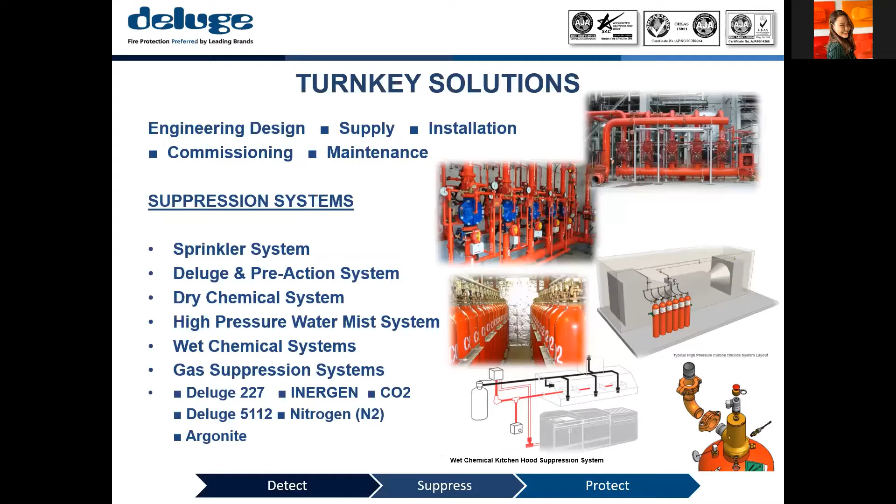We provide a full range of engineering fire protection services, including water, dry chemical, and our own gas suppression system, which we are here to learn about, as well as foam-based suppression systems and other firefighting equipment. Not to forget, fire detection systems. So yes, we have got you covered for all of your fixed fire protection needs. We use proven, reputable brands which adhere to stringent environmental standards to ensure our clients receive reliable, high-quality, environmentally friendly fire protection solutions.

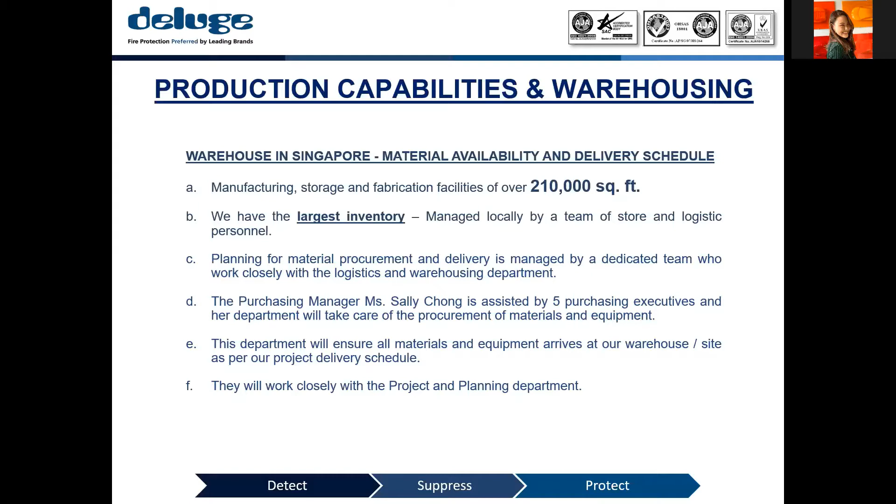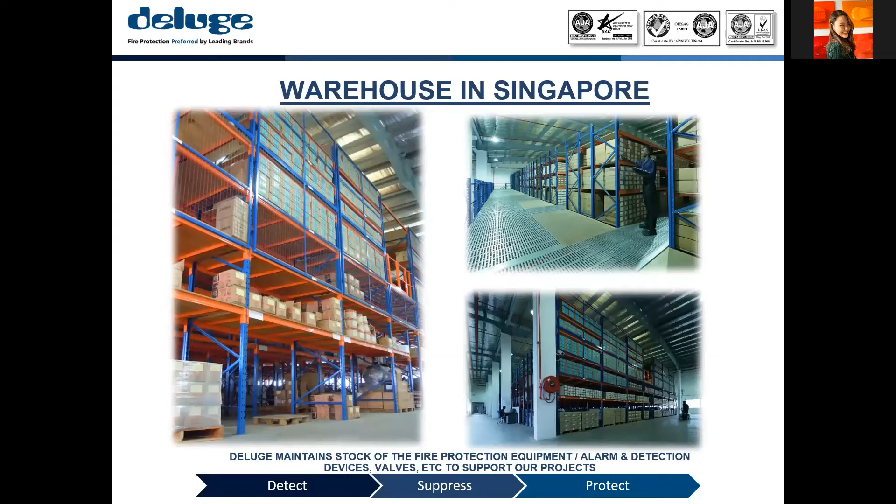Focusing on providing our customers a one-stop service shop, our warehouse of over 210,000 square feet has the largest inventory, in excess of $1 million worth of stock. Our in-house Deluge fleet of lorries, service vans, and aerial platforms can ensure timely and efficient deployment of manpower, materials, and equipment to sites. Apart from that, we enjoy the distinction of being the first fire protection company in Singapore to offer a one-stop design and build engineering solution.

With our prefabricated fire pipe solutions, we are the first fire protection company to invest and build our own factory in Johor. Our 8,000 square meter factory can produce up to 400 tons of prefabricated steel pipes per month to serve ongoing projects in Singapore and across the region.

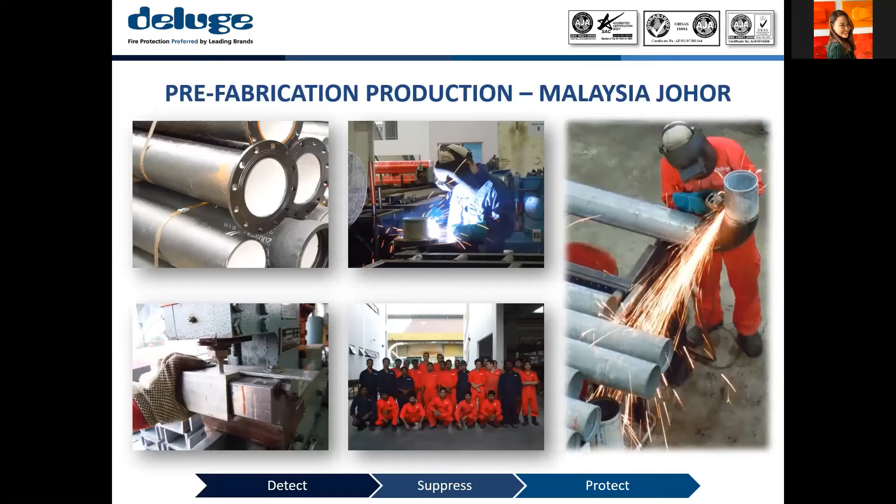Perfectly made to order, and the ability to quickly produce and assemble on our factory space allow us to quickly answer customers' queries, produce and deliver for fast-track projects. Prefabrication is the Deluge difference as it enables high-quality production and speedy delivery. This is the main reason why Deluge has decided to produce our own product as well.

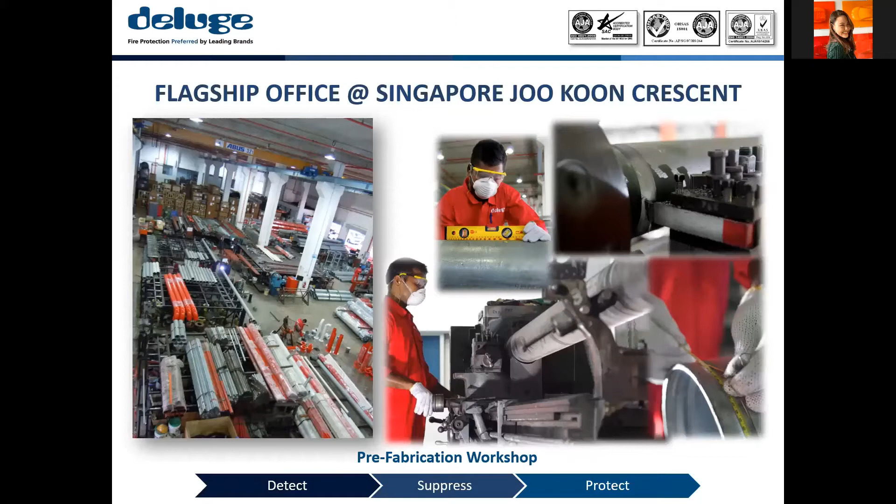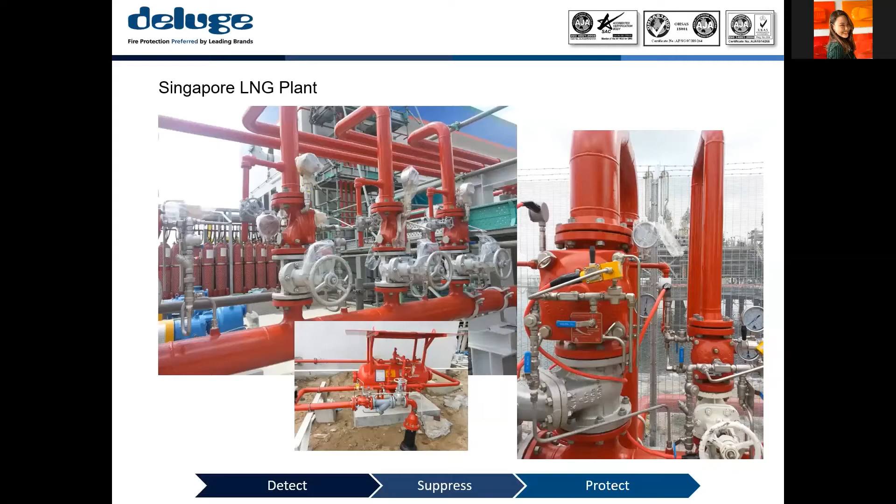So apart from prefabricated pipe, Deluge also offers a pre-assembled skid-based system, control valve and flow switches, being installed in many projects such as LNG plant, our Deluge valve house here, and our valve skids.

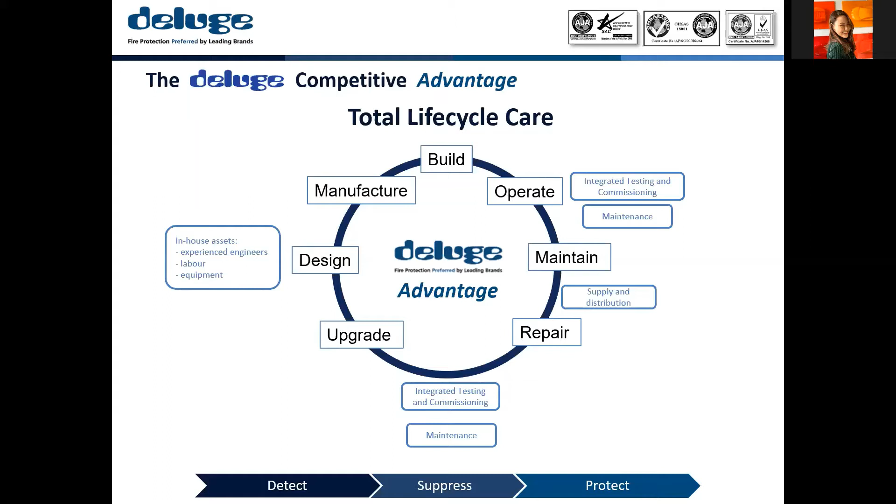To wrap up the story, Deluge has various in-house support groups and more than 600 skilled workers to work on our projects. We have many subsidiaries who work hand in hand with us to allow our customers to enjoy greater convenience and ease of cooperation from our full spectrum, one-stop service solution. As I mentioned earlier, Deluge has a BCA L6 grading for fire protection, which enables us to participate in tenders of any value in Singapore.

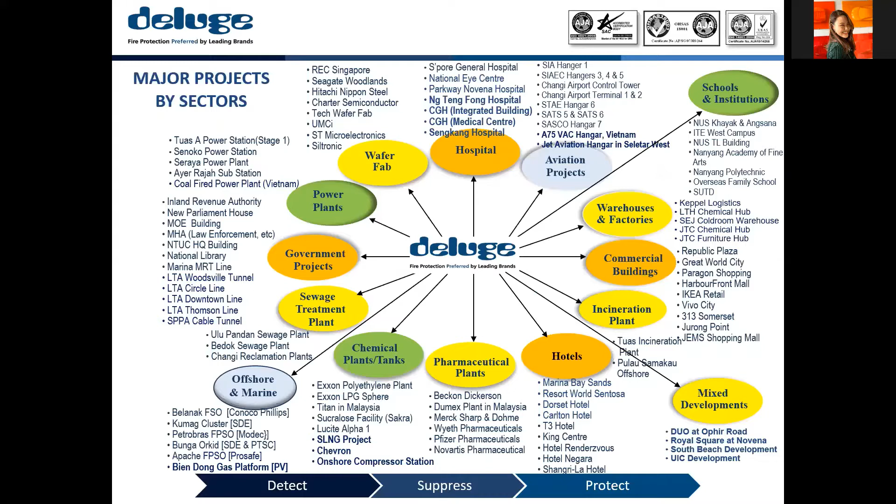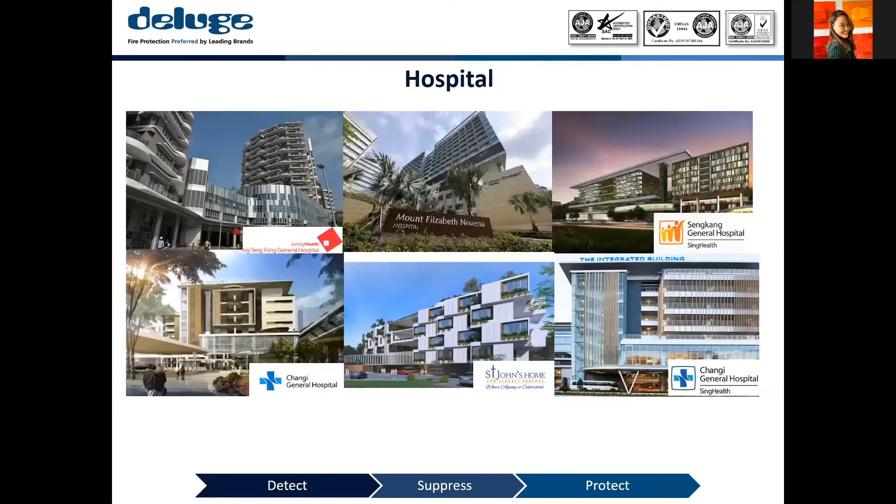We have served a diverse range of clients from various industries, local and abroad. We have quite a number of project references in all sectors, including both onshore and offshore ones, ranging from power plant sector, aviation, marine, oil and gas, hospital, commercial building and institution, government and infrastructure, and even waterfront projects.

The major projects we are working on in Singapore include JTC Defu City, Thomson Line MRT, Mandai Depot, MINDEF Military Project, Kim Chuan, National Skin Centre, Changi Naval Base, Changi Water Reclamation Plant, and many others.

So serving our customers with quality, reliability, and value makes Deluge preferred by many leading brands. And we truly hope to be the preferred partner to all of you here as well. So I hope you all get a clear picture of our company profile now. So let's move on to our training.

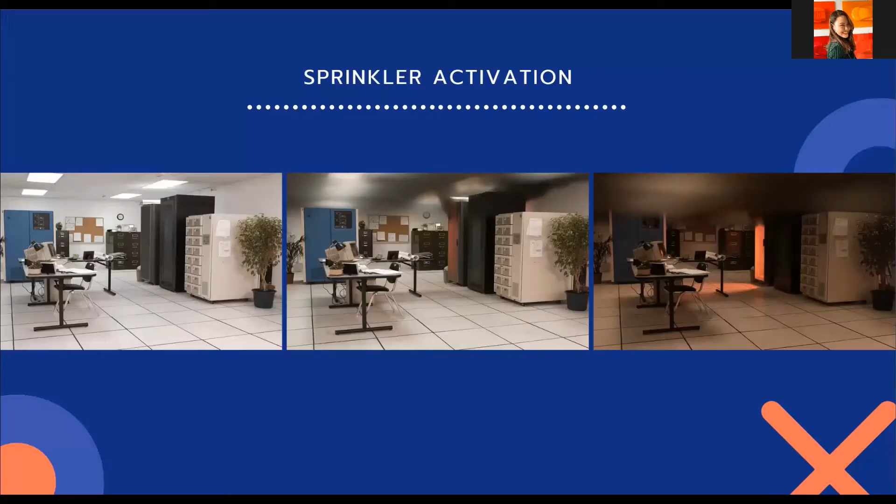However, with a sprinkler system, in order for the bulb to break, the fire has to be quite big for the heat to break the bulbs. And this is what happened when the sprinklers activated. As you can see from the picture, apart from damage from fire, this office also faces electrical equipment and other collateral damages as well.

With that said, any water used indoors means you are left with a moisture problem that needs to be addressed. Sprinkler system water damage can include wet drywall, carpeting, and other building materials. That damage is also followed by intangible costs, such as the loss of time. So how can we prevent that from happening?

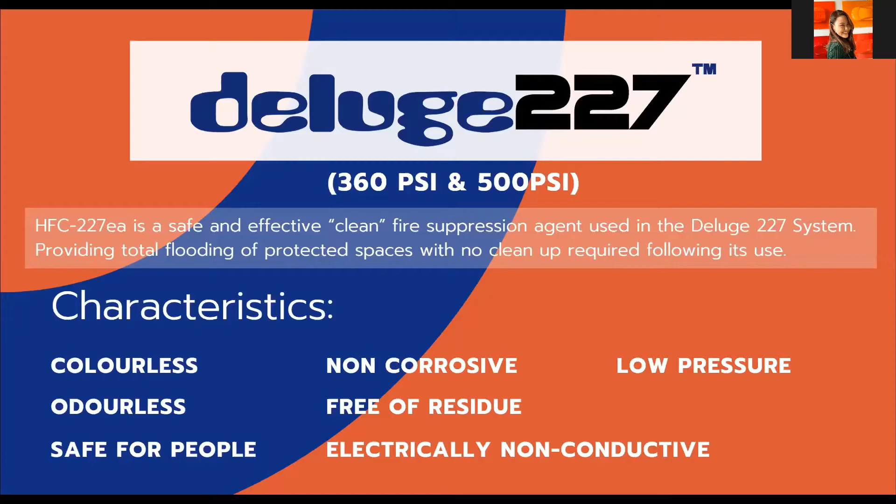So back to the answer to the previous question: the materials in your phone right now show that Deluge is now offering our Deluge clean agent suppression systems, namely Deluge 227 and Deluge 5112. Deluge 227 is a system using HFC-227ea, equivalent to FM-200, to suppress the fire. Its characteristics are colorless, odorless, safe for people, non-corrosive, free of residue, and electrically non-conductive. The system is low pressure. However, we have both 360 psi and 500 psi for further distance options.

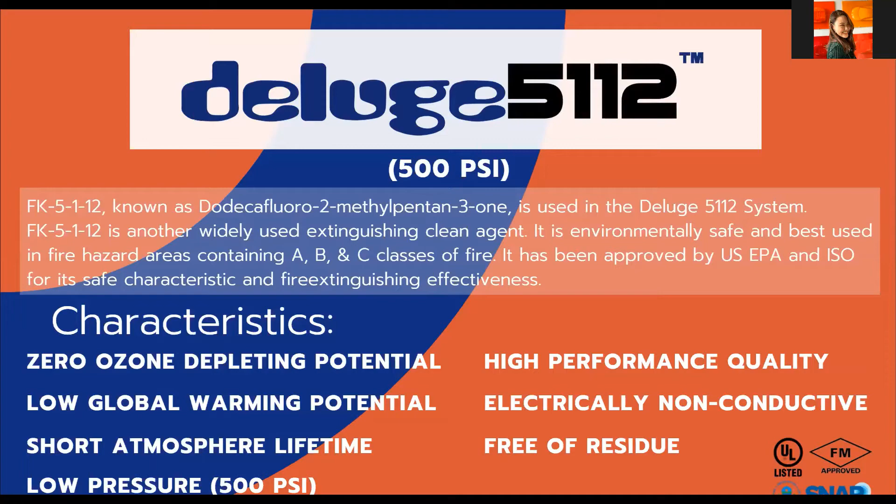Next is our Deluge 5112, which uses FK-5-1-12, equivalent to Novec 1230. The two gases are similar, and the only difference between them is the global warming potential. For Deluge 5112, we have a 500 psi system. Both clean agents are made from the same raw material. However, manufacturing FK-5-1-12 generally requires more raw material and is harder, hence the higher cost per pound compared to HFC-227ea.

HFC-227ea is also known to be used as the propellant for asthma or Ventolin inhalers. A majority of military projects still insist on using HFC-227ea. In terms of firefighting, the release of HFC into the atmosphere contributes a very small amount compared to other industries, such as the air conditioning industry.

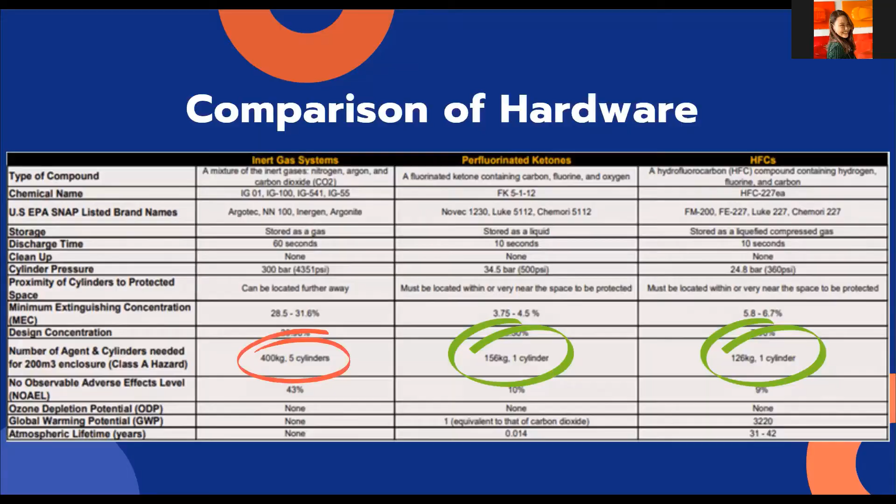However, when talking about clean gas suppression, you might ask, why not inert gas systems? Let me tell you why. This table shows the typical agent required for the same enclosure, 200 cubic meters. As you can see in the red circle, IG systems require more agent and more cylinders. It requires more FK-5-1-12 than HFC-227ea, and more HFC-227ea compared to previous Halon systems. For easier comparison, IG uses up to 5 cylinders, compared to Deluge 227 and Deluge 5112 systems, which only use 1 cylinder.

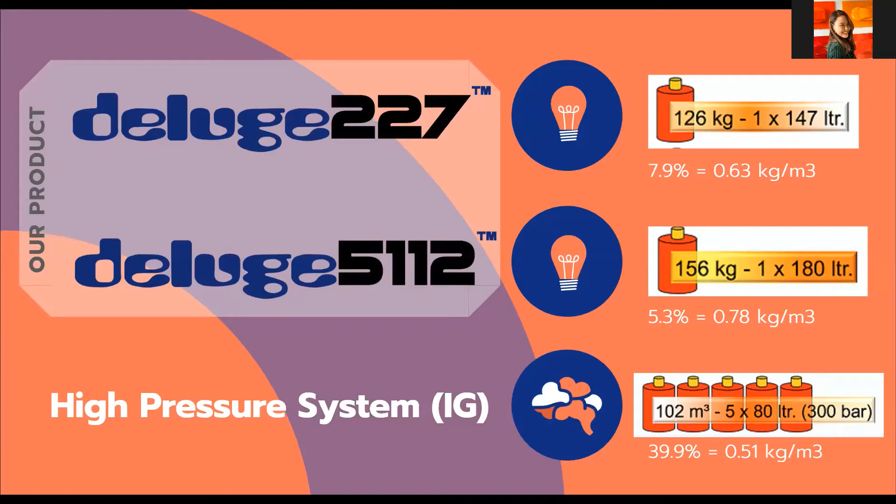And of course, more cylinders incur mechanical component costs along with them, such as valves, flexible hoses, or check valves. Less agent means fewer cylinders and less storage space, which leaves our clients more rentable space and saves maintenance costs as well. The additional hardware of IG systems requires more maintenance compared to Deluge 227 and 5112 systems. So the upfront cost may be lower in some cases, but the long-term cost will be higher.

Not to mention that IG systems are also dangerous; there are cases where cylinders explode because of the high working pressure. The general working pressure of IG systems is 8 to 12 times higher than low pressure systems. Low pressure systems generally do not require a PRD, or pressure relief damper. However, for high pressure systems, this is a requirement.

Another key point to note in low pressure systems is that there is no potential damage to hard disk drives. So for data center projects which require decibels to be less than 120, a low working pressure system will be a suitable solution, whereas high working pressures can create noise more than 130 decibels and hence pose a potential risk to the hard disk.

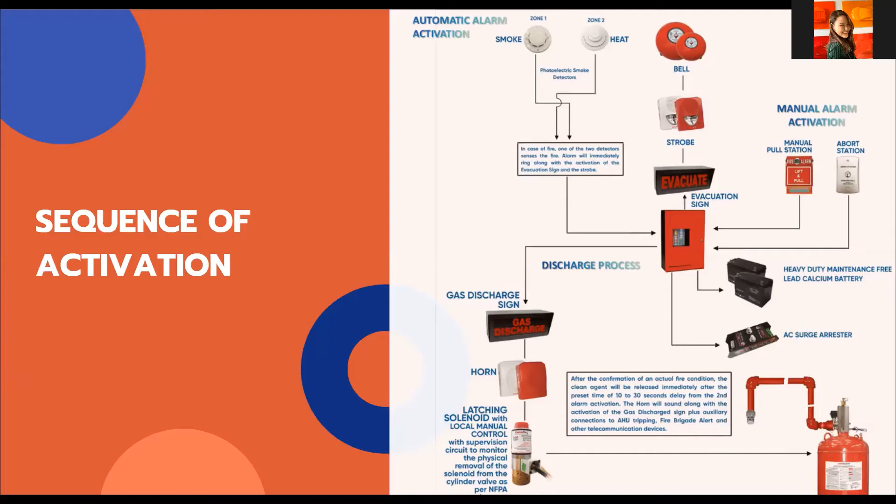Now that we have learned about the system, we need to know how we can ensure the quality of the products, right? So let me talk a little bit about our approvals to assure you of the system.

The Deluge system is UL listed under file number EX28145 in the directory for total flooding protection against all Class A, Class B, and Class C fires, covering the range of design, installation, operation, and maintenance. The clean agents we use in our system are UL components recognized, FM approved, and United States Environmental Protection Agency SNAP listed.

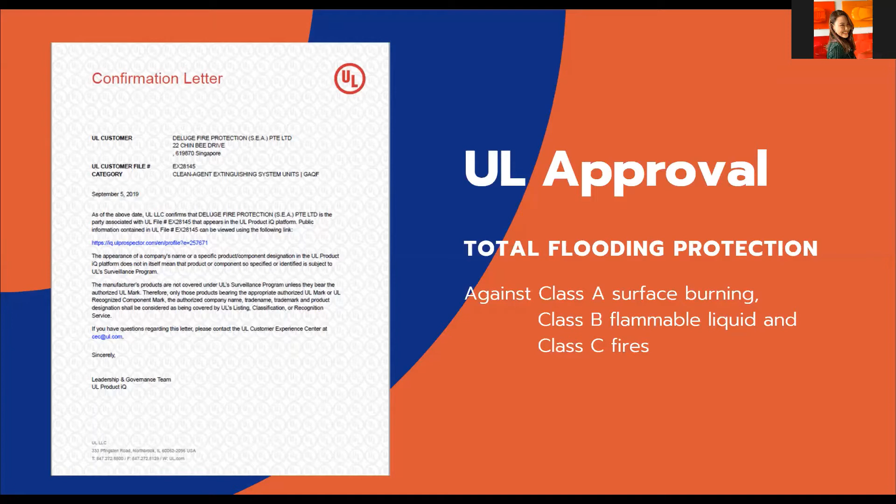First, Deluge chooses to offer 12 different sizes of cylinders ranging from 20 pounds to 1,200 pounds. Some of you might wonder, why do we offer so many sizes? The reason is to be cost efficient.

Imagine if a server room needs 375 pounds of gas. Most gas suppression distributors will give you two 200-pound cylinders, but we as a manufacturer will give you only one 375-pound cylinder. This in turn saves you from paying for extra mechanical components.

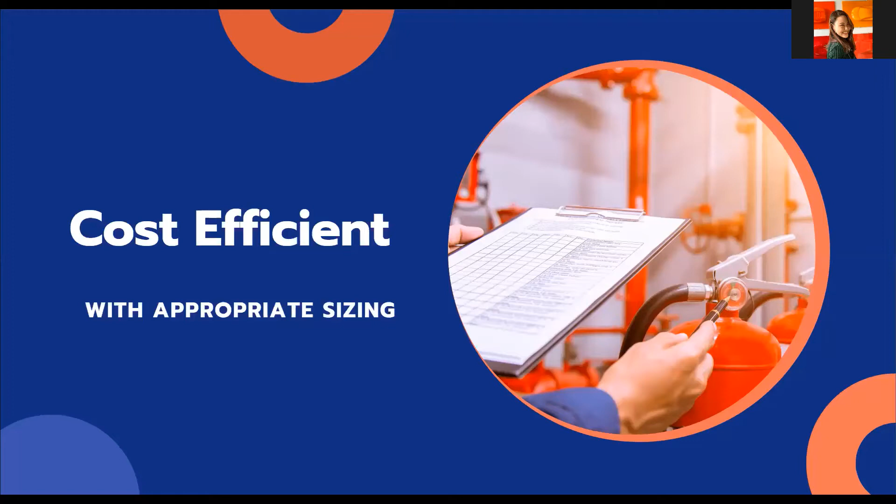However, there are more ways to improve the product, so we did not stop there. Our in-house research and development team has found another solution. From hearing the pain points of our clients, we know that one of the major challenges of the fire suppression industry is galvanic corrosion.

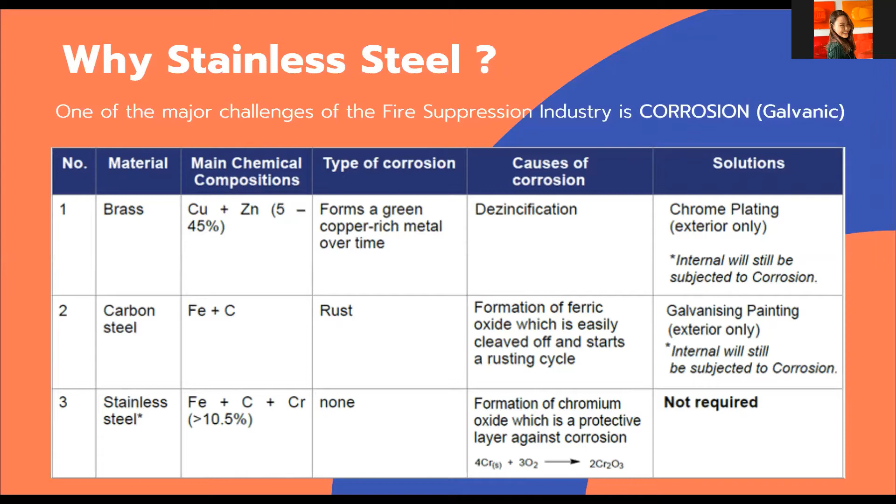The standard cylinder in the market uses a brass valve with a carbon steel cylinder. Both materials are dissimilar and will eat into each other, causing corrosion on the system components and often resulting in accidental discharge. So our R&D department has developed a way to stop the corrosion by using stainless steel.

The corrosion does not only come from the materials but also from the chemical reaction of the gases. When FK-5-1-12 comes into contact with water, it becomes a highly corrosive acid. However, if using stainless steel, there will be a formation of chromium oxide to protect against corrosion.

This is a graph showing the comparison of corrosive potential. As you can see, stainless steel, at the green arrow here, has the least corrosive potential compared to brass and carbon steel.

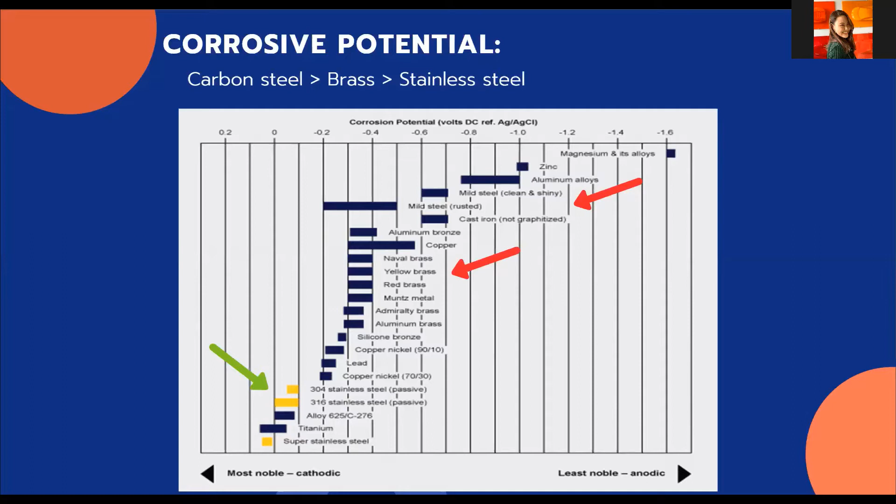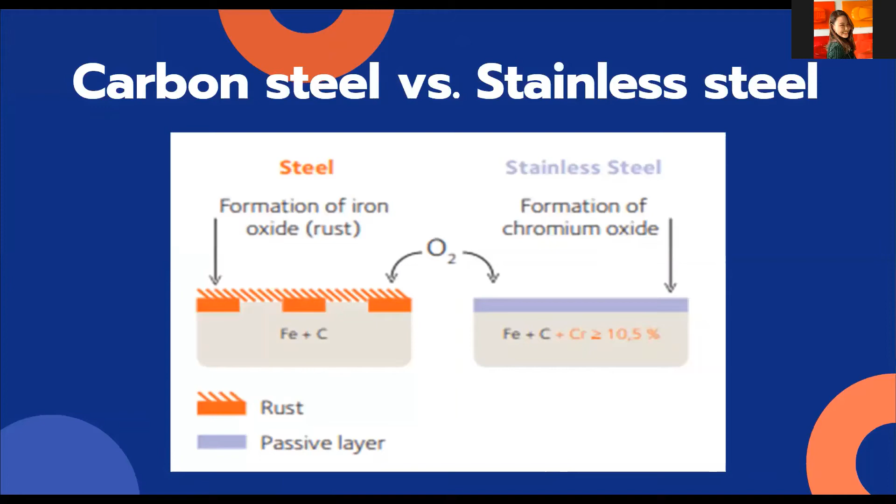The carbon steel in the market relies a lot on the thin paint on the cylinder to protect it from rust, whereas stainless steel does not. Once the paint is gone from maintenance or scratches on the carbon steel cylinder, corrosion will start.

As a conclusion, it is recommended to use stainless steel material, especially for the storage of FK-5-1-12.

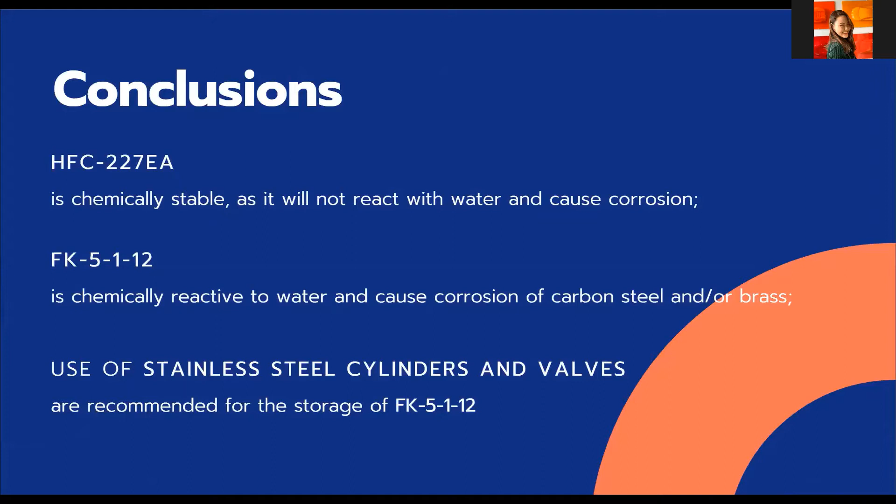With the problem stated, Deluge assembles our own valves and offers 316 stainless steel as a standard offering. Sizes range from half an inch to 4 inches, and the method we use is investment casting, which makes the molding method smoother.

We will also be launching our stainless steel cylinders this year to pair with our stainless steel valve, giving an even stronger quality product. You can be assured that it will be competitively priced and maybe on par with carbon steel cylinders.

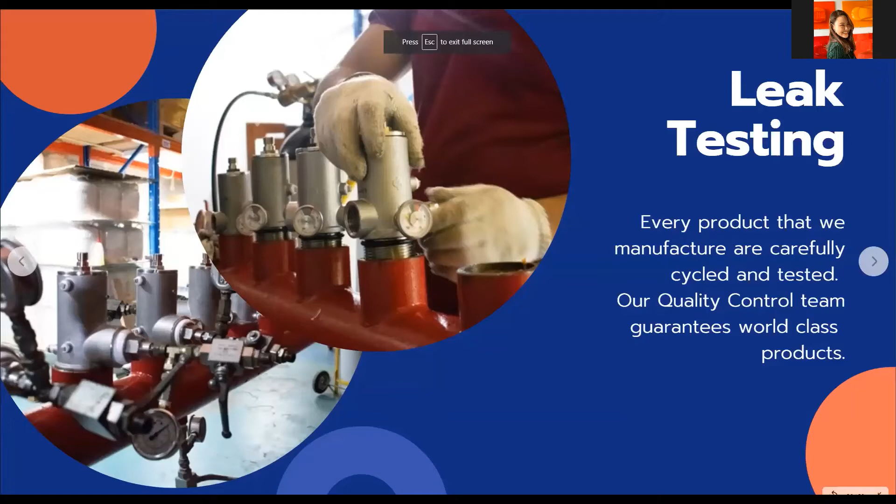Every single product we manufacture is carefully cycled and tested for leakage. Our quality control team at our manufacturing plant in Singapore guarantees only the best product. In order to get UL listed on our valves, every valve has to go through 500 cycles to pass the hydrostatic test.

Our nozzle drilling station here in Singapore is approved by UL. Deluge offers 3 different types of materials, namely brass, aluminum, and stainless steel. We will only drill the exact orifice size according to the flow calculation that we also provide for our

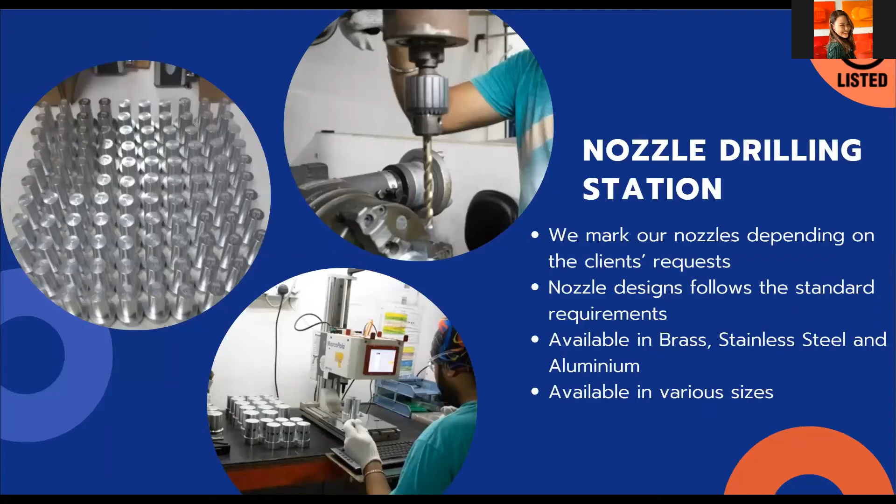customers in the design process, to follow all the standard requirements. All of our cylinders will be tested in hot and cold rooms to test the material expansion and contraction in extreme temperatures. Our system can be used in 0 degrees to 55 degrees Celsius.

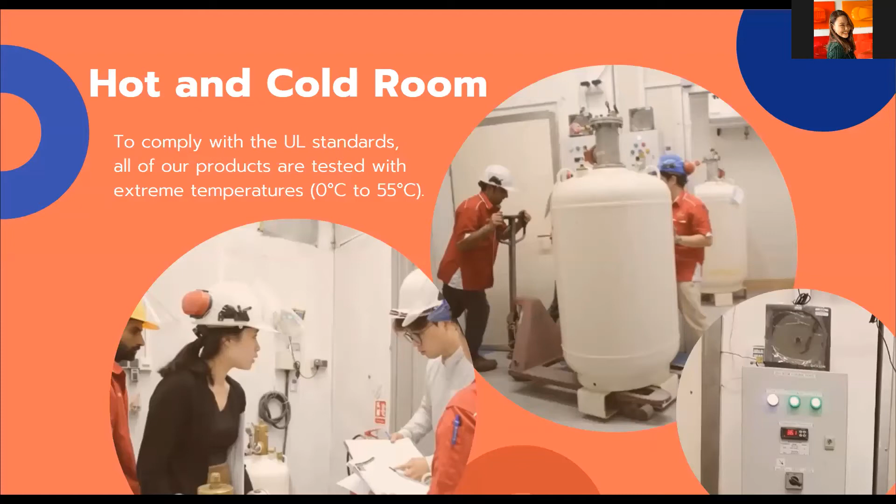We also conduct cylinder expansion tests and cylinder burst tests on our cylinders. Cylinders cannot burst at the seams or the welds, and this will be considered a fail in testing. The cylinders can only burst at the body. Moreover, Deluge cylinders are tested to 1000 psi, which is twice the system working pressure.

Also, under NFPA, after 5 to 10 years, we have to do hydrostatic tests on the cylinders, which can be done at our in-house facility.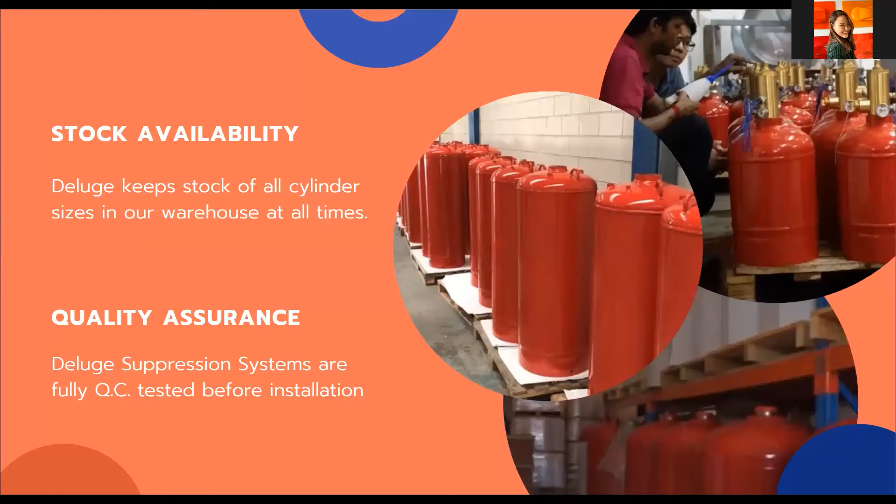Lastly, dealing directly with the manufacturer from within the region, our clients can enjoy a shorter lead time. Stock availability: we keep stock of all sizes of all cylinders in our warehouse at all times. We are able to provide a one-for-one exchange for critical situations in sensitive locations within Singapore. We do full QC testing before every delivery.

For both domestic and overseas projects, we carefully prepare and well secure our products before delivery. Last but not least, we at Deluge have our own UL listed filling station here in Singapore, making it fast and reliable to respond to our clients' inquiries within 24 hours. We keep stocks of at least 20 tons of both gases at all times.

Lastly, we at Deluge manufacture, integrate, and maintain. We carry our own name into this product as we believe in accountability and responsibility. We research and develop our products according to our customers' pain points and support our clients with fast response to their queries, constantly finding ways to be cost efficient for our clients.

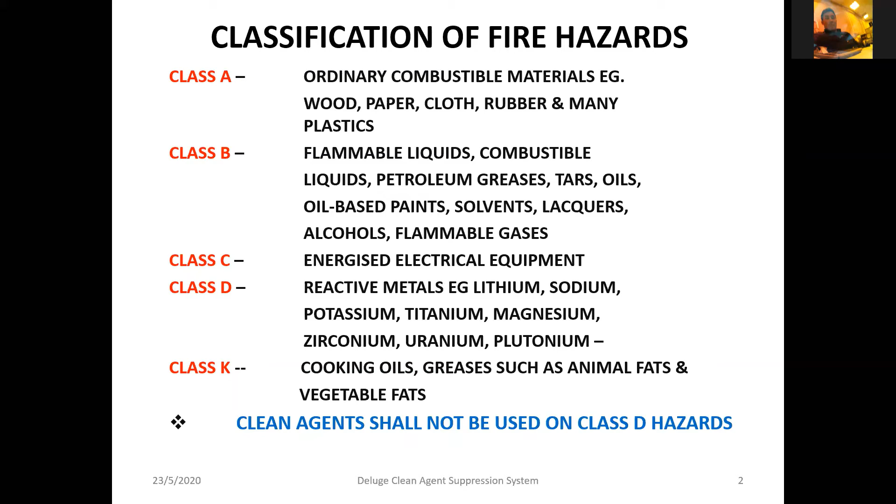When it comes to the minimum design concentrations for clean agents, namely FK-5-1-12 and HFC227, you have to know that there's a difference between the minimum design concentration and the minimum extinguishing concentration. The minimum extinguishing concentration is done by the NFPA 2001 using a cup burner test.

The minimum design concentration is the MEC times a safety factor. So let's say the FK-5-1-12 MDC shall be 4.7% and HFC227EA is at 7%.

You also have to determine the type of class of fire that you will be fighting. It's always good to identify what type of room this is—is it a server room, or what basically you're protecting inside the room? Then from there you can utilize the correct design concentration to actually protect the room.

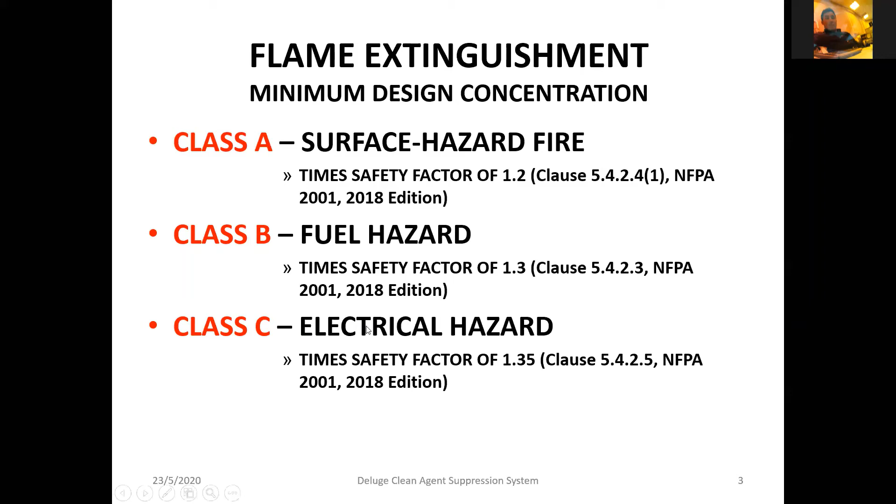So how do you determine the amount of clean agent required for the room? First you have to have the volume of the room—length, width, and height. I do realize there are some rooms in very odd shapes, but you would still have to determine the volume of the room. You also have to determine the hazard room ambient temperature.

The temperature of the room does affect the amount of clean agent required. If the room is hotter, you require less clean agent. If the room is cooler, you technically require more clean agent.

Another factor required to understand the design procedure would be the atmospheric correction factor, which will be touched on in the next slide. Basically, how high is the room that you're protecting, or depending on the geographic location of where you're protecting, it can be another factor which determines the amount of clean agent required.

Usually for offshore projects, you tend to require more clean agents because it's specified—obviously in oil and gas, they tend to be more worried, so they usually ask for a higher design concentration to protect their premises.

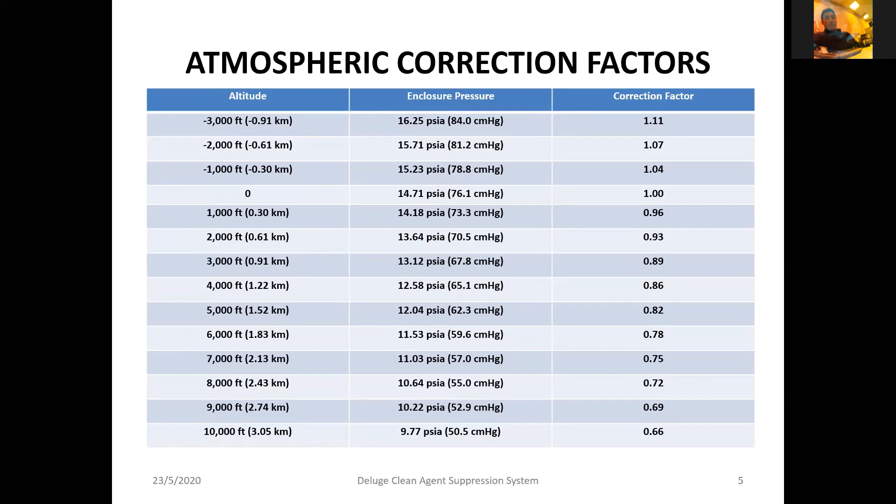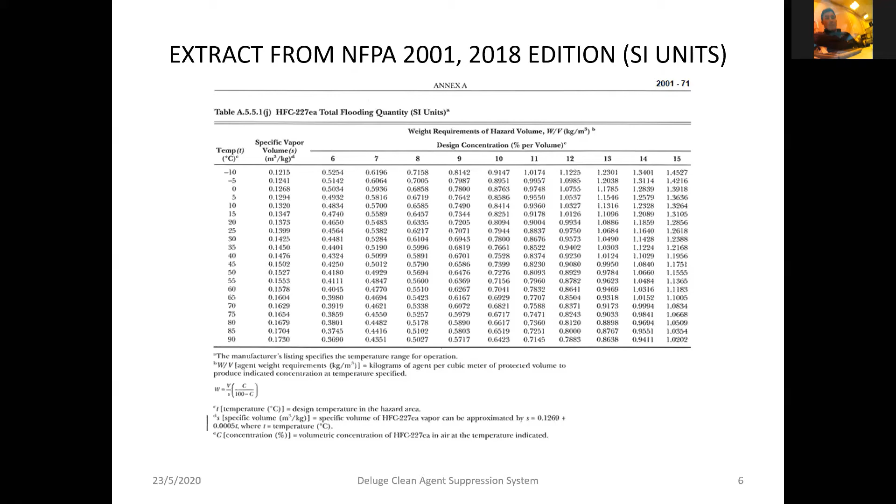Okay. So what do you do when you determine the amount of clean agent required to protect the room? You would have to select the appropriate cylinder size. So obviously if you require 100 pounds of clean agent, you don't use a 600-pound cylinder or a 560-pound cylinder. It's best to use either a 100-pound cylinder, depending on design, or a 150-pound cylinder to factor in more nitrogen to push out the clean agent. So the next slide.

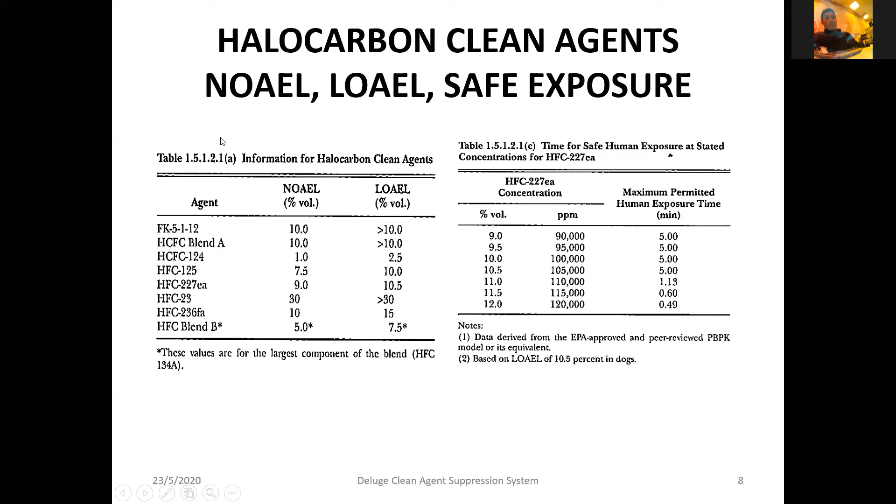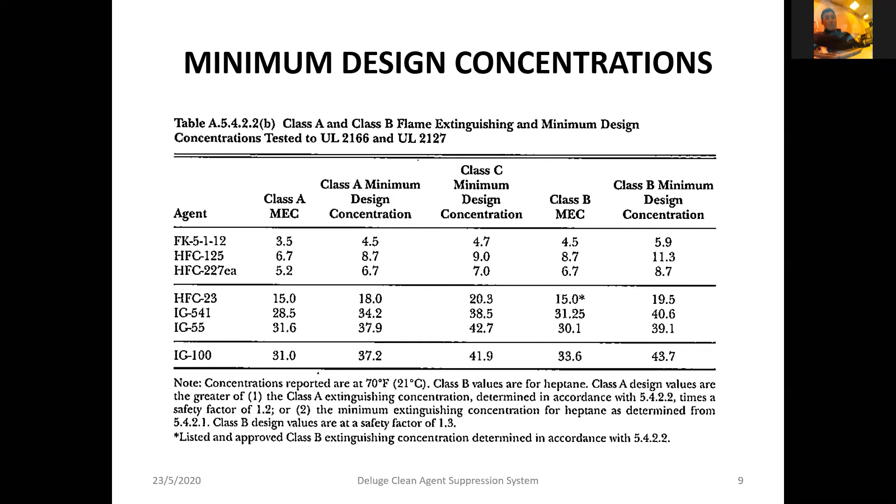Okay, so as you can see, there is a difference between the MEC, the minimum extinguishing concentration, and the minimum design concentration. The minimum design concentration is a safety factor of the MEC. Usually for Novec or FK-5-1-12, the minimum design concentration is 4.7%, and we usually utilize class C. For HFC 227, the minimum design concentration is 7%. This is tested at 21 degrees Celsius or 70 degrees Fahrenheit.

So additionally, what other design factors would you have to take into consideration when designing a clean agent suppression system? Unclosable openings and their effects on distribution and concentration. Let's say you're protecting a laboratory fume hood, where you know the opening is constantly open. So how do you protect the volume in there? Usually you would have to add an additional safety factor of 20 to 30% to account for this unclosable opening.

Control of acid gases, reignition from heated surfaces. So it's always good to understand the room, what you're protecting, and how the room is designed. What are the materials of the walls? From there you can factor this in. And obviously the fuel type, configuration, and scenarios not fully accounted for in extinguishing concentrations, which you would have to be present to find out. The shape of the room, not mentioned here, has to be taken into consideration as well: different shapes, odd shapes, circular shapes.

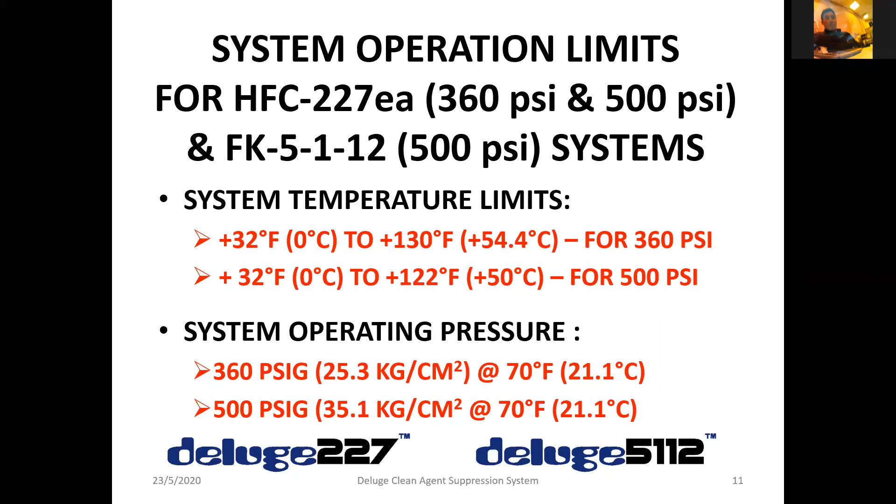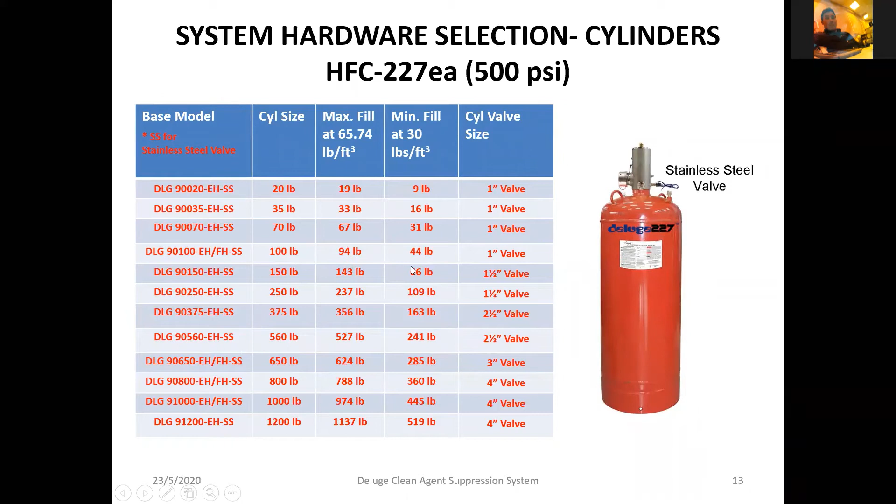As mentioned previously, the Deluge offers 12 different sizes, ranging from 20 pounds all the way to 1,200 pounds. Please note that each cylinder has different valve sizes and min and max fill. If you have 100 pounds of clean agent that you've determined by calculating the volume multiplied by the design factor, you do not use a 250-pound cylinder, because the minimum fill is 109 pounds. It's best to utilize the correct cylinder, which would be the 150 pounds, so your fill is between the minimum and the max.

FK512 is a little bit different. The min and max fill range, as you can see, for the 1,200 pounds, the max fill is 1297. If we go back to the HFC, it's 1137. This is based on the density of the actual chemical involved. So with FK512, you can actually pack more clean agent within the cylinder.

Okay, the cylinder valve. The cylinder valves used in our systems are back pressure type valves. The activation of the valve is from the equalization of pressure from the top via a latching solenoid or pneumatic slave. When the pressure on top of the piston is relieved, the pressure from the cylinder slides it to its open position. This portion will slide up, and the gas will push up and out to the outlet here.

As mentioned previously, the valves we're offering are 316L stainless steel valves. It comes with a burst disc, a safety release device in case of overpressure. For the smaller cylinders, it's at 900 PSI; for the larger cylinders, 800 PSI. You have the pressure gauge, the outlet, and the top plug, where you would attach either a pneumatic slave or a latching solenoid.

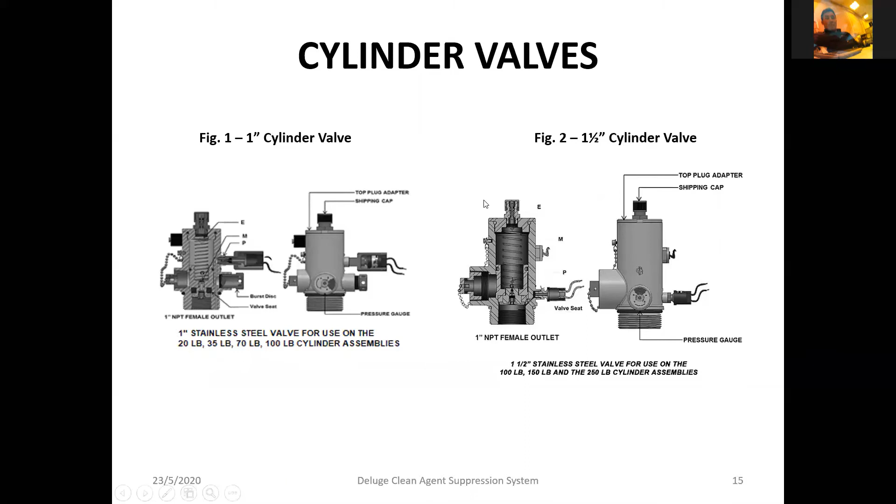Okay. Obviously, the flex hose, please use the appropriate size of flex hose. So if it's a 4-inch valve, don't use a 2.5-inch flexible hose. It's a 4-inch flexible hose. Yeah.

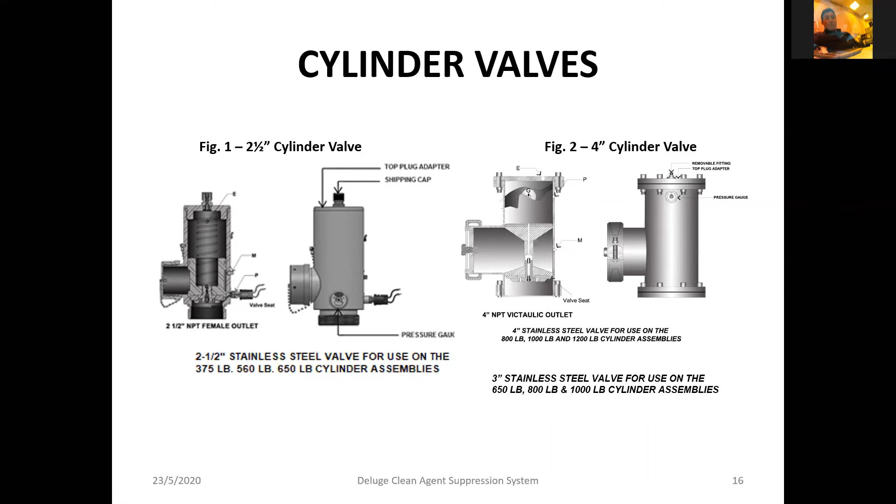So these are some of the pictures of the cylinder valves that we offer, right? From the 1-inch, 1.5, 2.5, 3-inch, and 4-inch. We have it in 304, 316, and 316L, but the majority of our standard offering is 316L stainless steel.

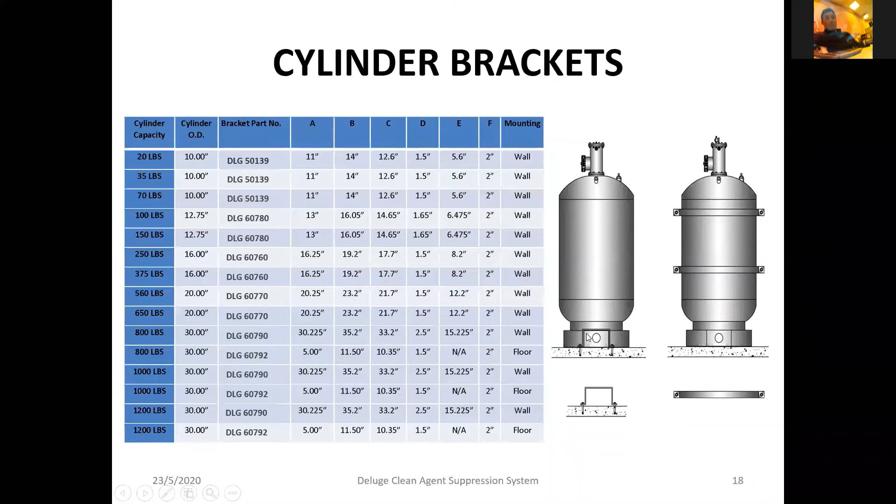So when attaching brackets, you can either attach it directly to the wall, or it can be attached using a C channel, as over here, as you can see. Yeah. Make sure that the pressure gauge when installing a cylinder is facing outwards, right? Sometimes people put the pressure gauge facing inwards. That means it's facing the wall. This will cause a lot of issues when it comes to maintenance.

So when designing a system, make sure you determine if the outlet's on the left or on the right. For Deluge systems, the outlet is always on the left of the pressure gauge. So the pressure gauge will be here, the outlet will be here. Then from there, you determine the pipe.

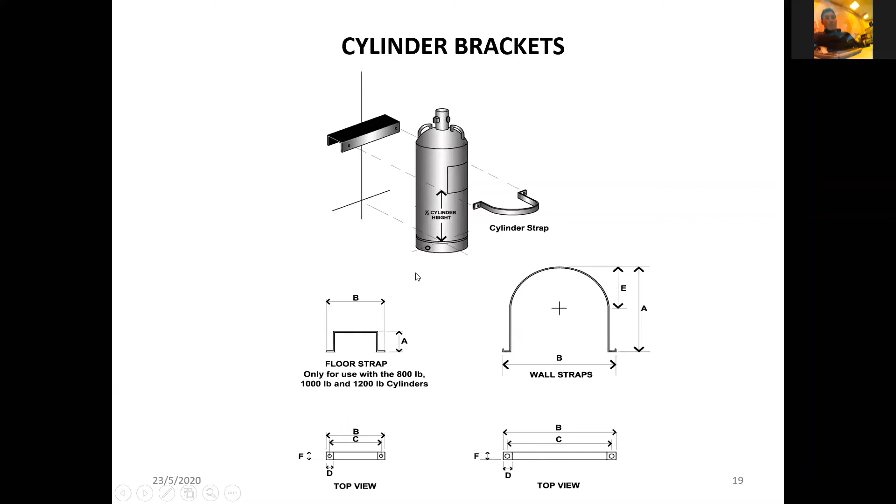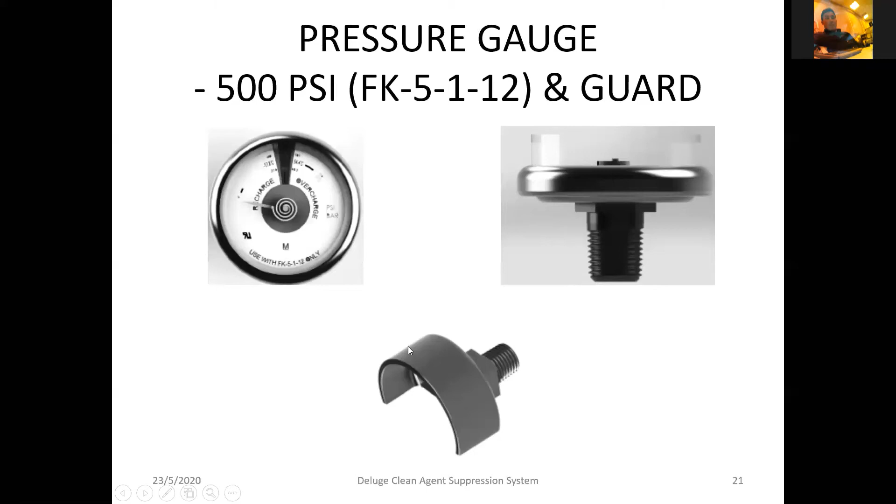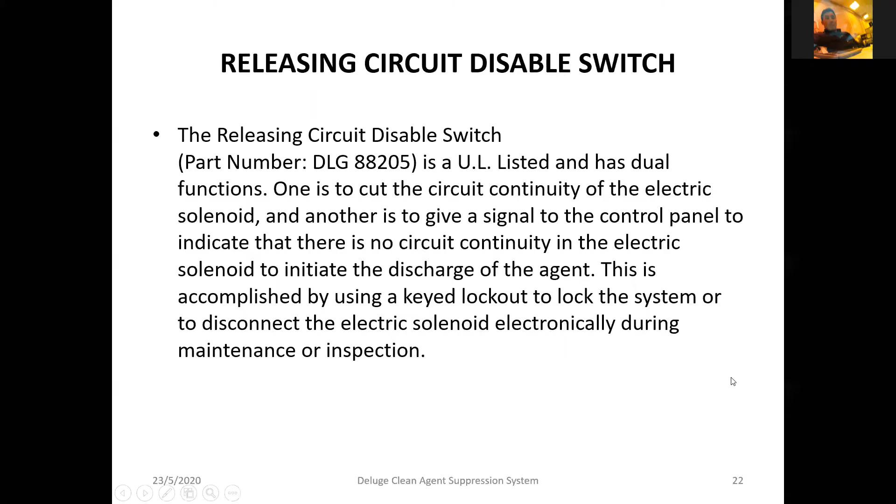So the latching solenoid has replaced the electric solenoid. So what a latching solenoid does is that whenever you remove a latching solenoid, it is able to send an error signal to the panel that the latching solenoid has been detached, right? So when testing the latching solenoid, ensure that you disconnect the latching solenoid from the top plug adapter of the valve, because sometimes it can accidentally fire, right?

We have certain cases where the latching solenoids have been placed in certain magnetic environments. This sometimes can cause accidental discharges. So take note of the environment that you're protecting as well. Yeah. So, okay. So the actuator is held in a latched position without power until a signal from the agent release control panel cuts off the permanent magnet.

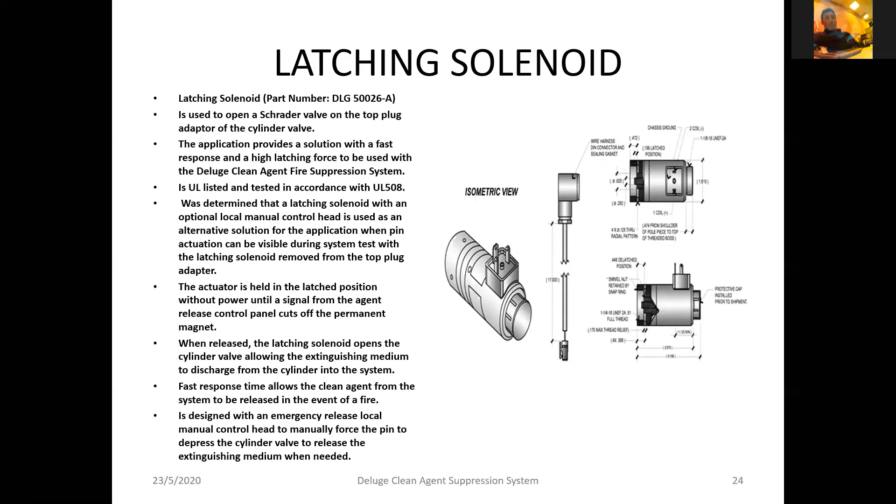When released, the latching solenoid opens the cylinder valve, allowing the extinguishing medium to discharge from the cylinder into the system. Fast response times allow the clean agent from the system to be released in the event of a fire. It is designed with an emergency release local manual control. As mentioned before, the local manual control is to be put on top of the latching solenoid. You have to manually force the pin to depress the cylinder valve to release the extinguishing medium when needed.

So this is another form of activation for the cylinder: if you have more than one cylinder, you can use a piston actuator slave. This would technically save more cost and reduce power draw from the control panel. It features a pneumatically driven piston that depresses a Schrader check valve, thereby venting the pressure, which is the same. So it does it pneumatically instead of electrically.

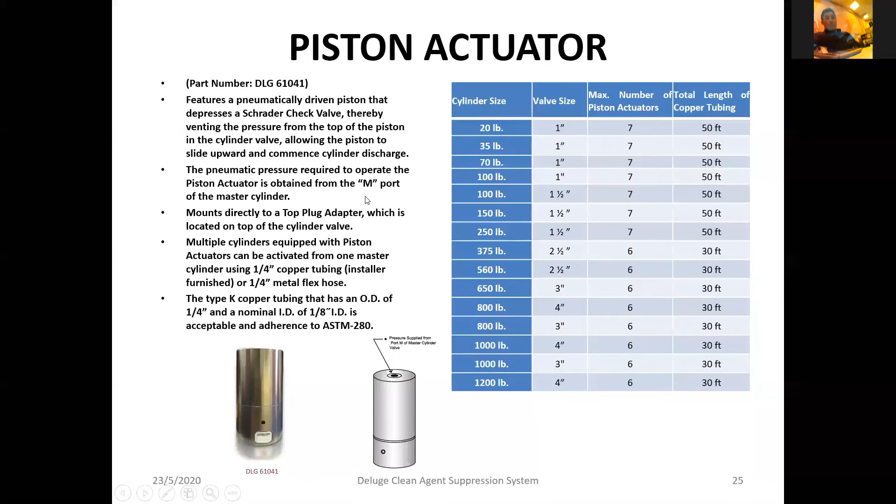For you to activate it, you can either use a flexible hose or copper tubing. It really depends. It is to be connected on top. So with the piston actuator, you can see this is the master pilot, and these are all the slave cylinders that are to be pneumatically activated.

There are certain constraints, because the more cylinders you have, by the time this activates and by the time the last one activates, there is a time difference. So there is always a limit to the number. You cannot just daisy chain everything on. There has to be a limit because there is a timing issue from when this is released to when this is released. So you always have to take note of this.

When it comes to discharge nozzles, as mentioned previously, there are two different types: the 180 sidewall and the 360 central. It was asked previously whether this is a silent nozzle. Technically our system does not require a silent nozzle because ours is not a high pressure system.

If you look at all the silent nozzles being offered in the market, those are for high pressure systems: IG100, IG541, CO2 systems. Those require silent nozzles because they're 8 to 12 times higher pressure, which when discharged creates a high pitch. But our system being a low pressure system, you don't require a silent nozzle. When we tested it, the discharge is less than 100 decibels. So it will not disrupt your hard disk drives in data centers or your server racks.

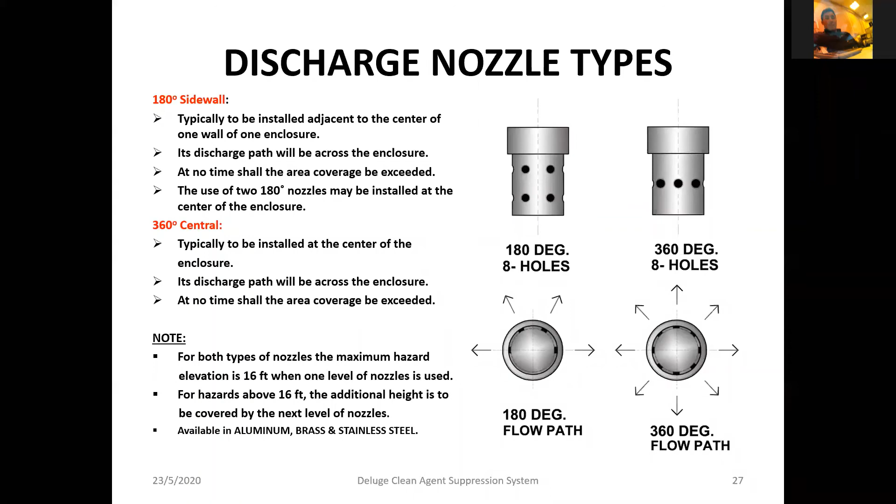So this is the discharge nozzle selection, right? This is determined by the flow rate. The largest nozzles that we offer are the 2-inch nozzles, where the maximum flow rate is 33 pounds per second. From the quantity of the HFC 227EA or the FK512 determined earlier, divided by 9 seconds. 9 seconds is basically below the 10 seconds that is required under NFPA.

This will determine the main pipe flow rate. From the table on the right side, find the nominal pipe size that is required, and this will also determine the nozzle size. For flow rates more than 33 pounds per second, you have to determine more nozzles to cater to this higher flow rate.

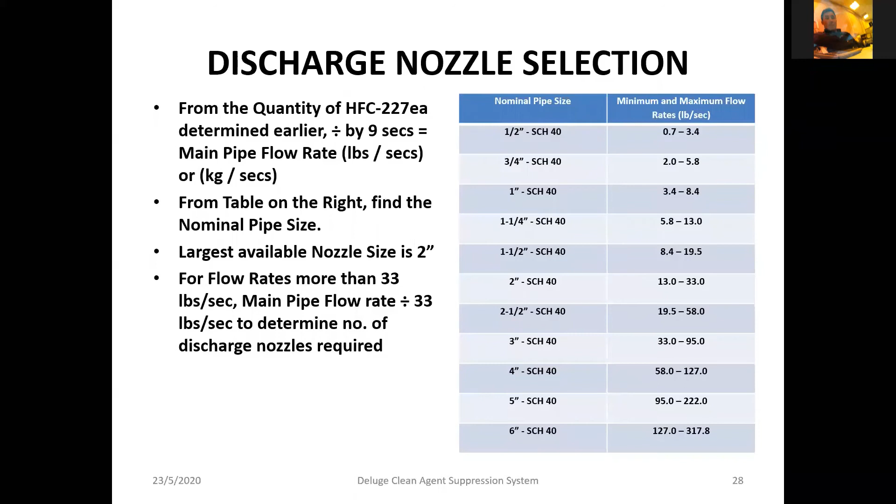So as mentioned previously, we have 3 different materials of nozzles: aluminum, brass, and stainless steel. Stainless steel we usually offer for offshore oil and gas projects, which they really like a lot. Aluminum can only be used for HFC 227EA systems. For FK512, we can't use aluminum, we can only use brass.

So the nozzle coverage area, as I mentioned, I don't know whether you can see my mouse. If you have one nozzle at the side here, it is capable of protecting 40 feet in this direction and 40 feet this direction. For a central nozzle, you can only protect 20 feet this direction, 20 feet this direction. Oops, sorry. So a back-to-back 180-degree nozzle, you can protect a maximum of 80 feet over here.

A 180-degree nozzle shall be installed with the inlet of the nozzle perpendicular to the ceiling. The side holes of the pattern are to be parallel with the wall on which the nozzle is being installed. All nozzles are rated for a maximum hazard height of 16 feet or 4.8 meters. If the hazard exceeds 16 feet in height, multiple tiers of nozzles must be used for each 16-foot increment of the height of the enclosure. The maximum area coverage per nozzle is 40 feet by 40 feet, otherwise known as 1,600 square feet, which is about 148 square meters.

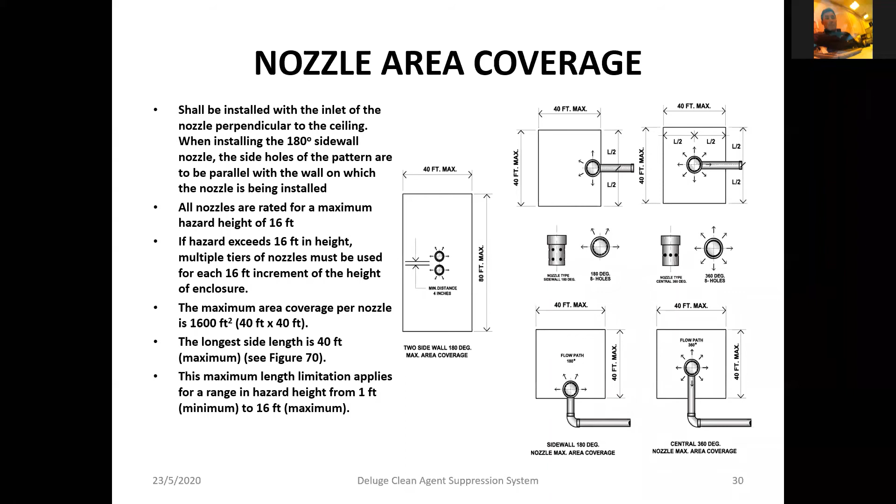So this is the nozzle elevation. As mentioned previously, it doesn't matter which type of nozzle, the maximum height that you can protect is 16 feet or 4.8 meters. So what do you do if the room is more than 4.8 meters, or twice that height? You would have to have tiers, so 2 different levels of nozzles. This one will protect this portion, and this one will protect this portion.

I understand that yes, the gas will actually flow down, but this is all within the NFPA guidelines. Certain places may only want to put a nozzle on top here because they know it doesn't matter, the gas will flow down and protect this area as well. But under NFPA guidelines, we have to ensure that it is tiered this way, one on each level.

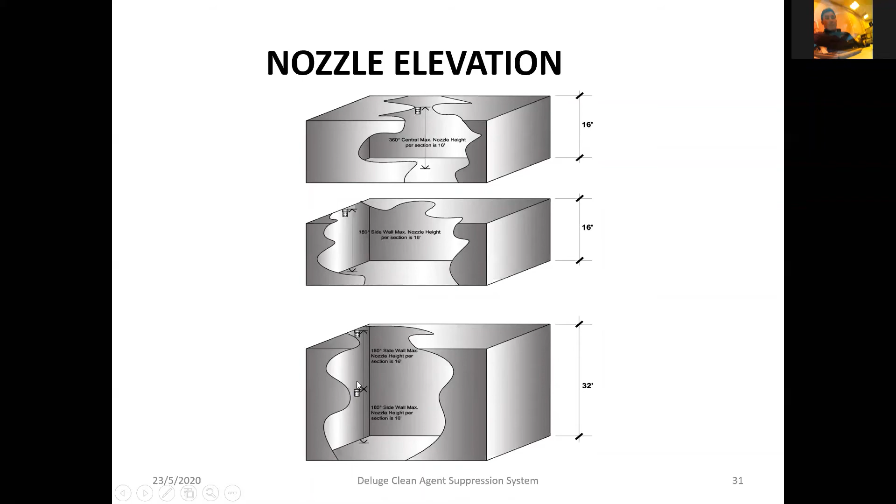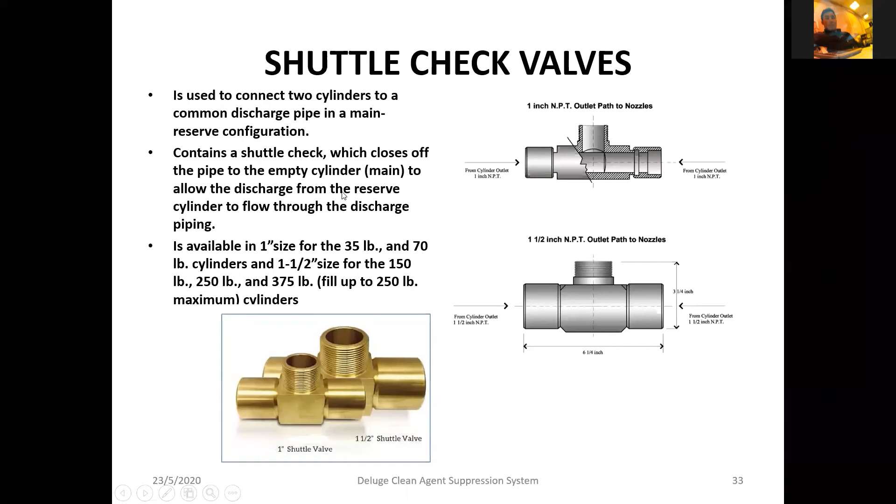Check valves are required so that there is no backflow into the other cylinders that have been manifolded together. We have different sizes of check valve: 1 inch, 1.5 inch, 2.5 inch, 3 inch, and 4 inch. The number of check valves required is usually the number of cylinders within the manifold, so every cylinder within the manifold will require a check valve.

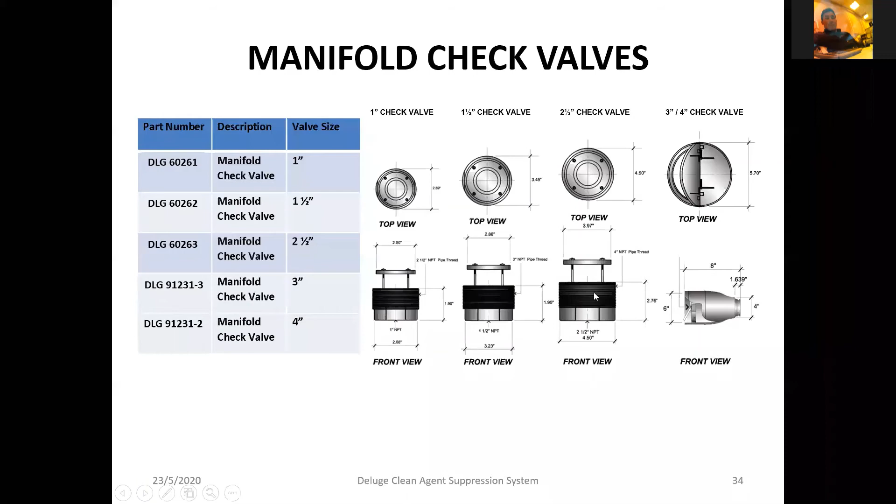This is to prevent the loss of agent in the event that any of the agent storage cylinders are not connected to the manifold at the time of system discharge, to prevent the backflow of agent into other cylinders attached to the manifold.

The components are constructed from brass for durability and protection. We are trying, over here at Deluge, to change all these brass check valves into stainless steel check valves, and we're in the process of R&Ding that. The check valves must be installed in a vertical position, only with the check disc on top.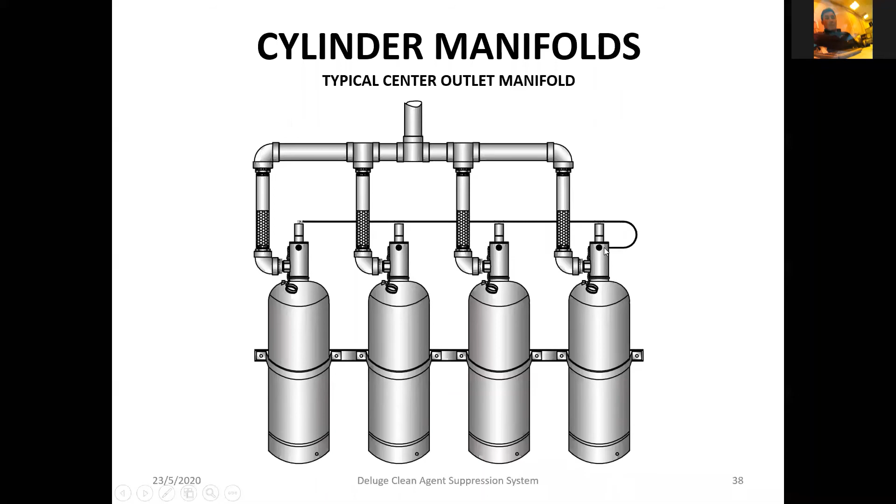The liquid level indicator: we offer it for all cylinders above 150 pounds all the way to 1,200 pounds. The reason we use a liquid level indicator is to determine the amount of clean agent within the cylinder. This can be quite troublesome if you have a 1,200 pound cylinder and no liquid level indicator, since sometimes you would have to manually weigh the cylinder to determine the amount of clean agent inside.

I know there's a newer generation from, I think it's called Coltraco, which uses ultrasound to actually determine the amount of clean agent within the cylinder. That is quite costly. So for our systems, we have provided as a standard offering a liquid level indicator for cylinders 150 pounds and above.

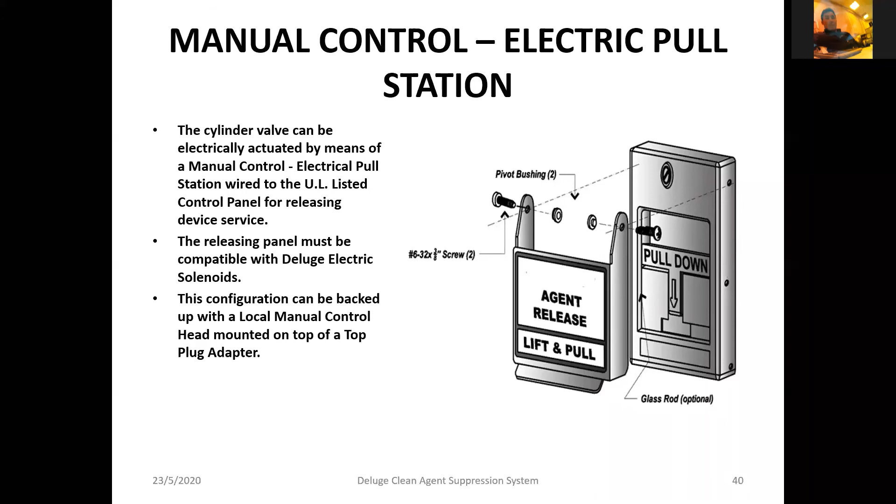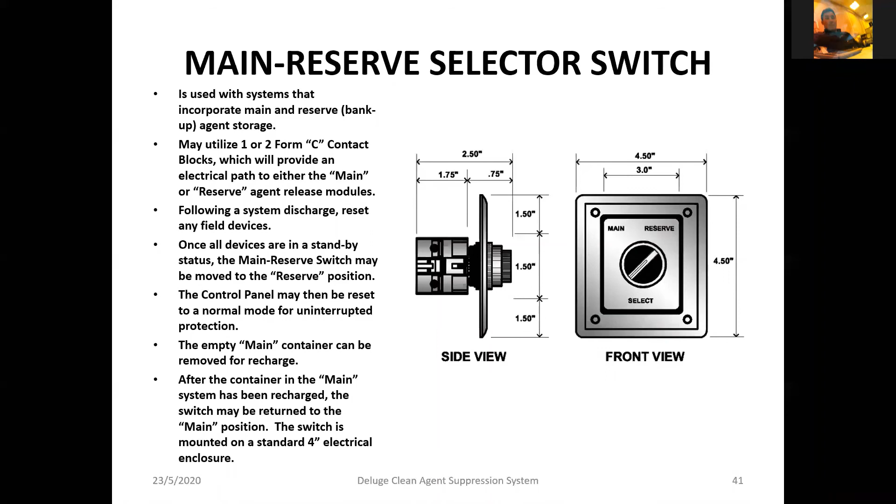As mentioned, the shuttle check valve can only be used for a main and reserve setup. If this one's being pushed, this portion will slide to the right and then be released from here. The abort switch that we offer is the dead man type, meaning you have to constantly keep your finger attached and held at the abort station to pause the countdown of the release for the clean agent.

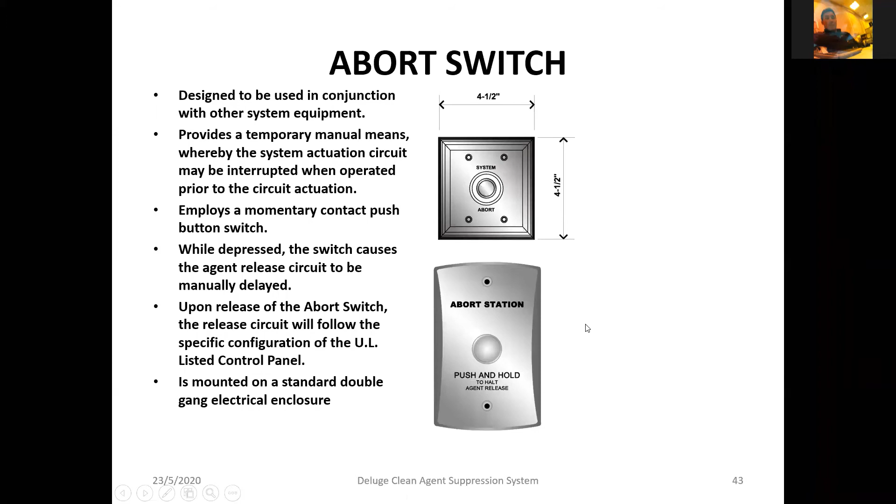This is a typical design of how we place the cylinders. Most of the cylinders that we place within the room should be at the closest corner towards the door.

There are different ways you can branch out the system. What I prefer to do when designing a system, when using the flow calculation software, is to use bull tees, meaning it will branch out into two, instead of using through tees, whereby it goes forward and cuts out, or a branch tee. This way it's easier to balance the flow, to meet the amount of pressure required and also the timing of the 10 seconds.

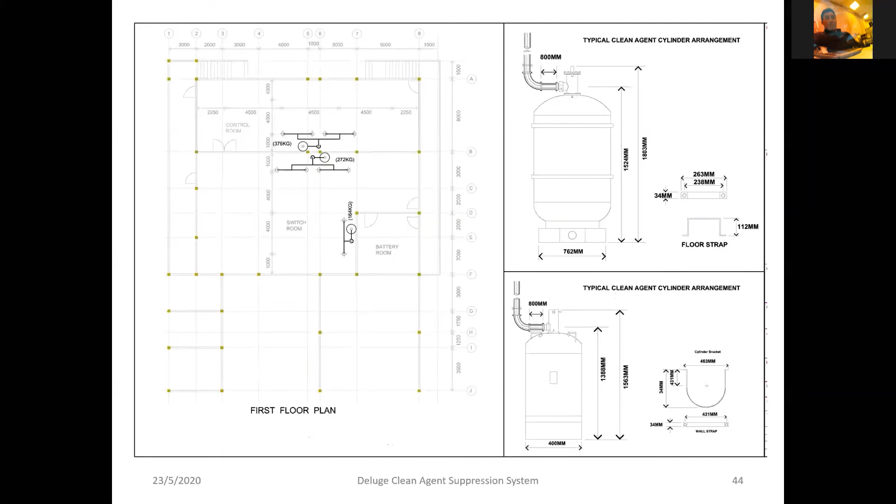We will not go too much in depth into the flow calculation because it's quite in depth, so I don't think we have the time to further discuss it.

If you were to change it to a through tee method, you would have to try and balance the amount of clean agent coming out at each nozzle. This can be really quite tiresome and tedious. So what we always do is we always offer a bull tee.

When it comes to maintenance, quite a number of people want to know when we need to do the maintenance for the cylinders. Obviously, there's a monthly maintenance and an annual maintenance. The monthly maintenance is basically a visual inspection of the system to ensure the pressure gauges are in the operable range, ensuring nothing has been tampered with or altered, and there's no obstruction to any mechanical devices. This is an extract from NFPA 2001, showing the guidelines of maintenance. Obviously, each manufacturer has their own maintenance guidelines that you would also have to follow.

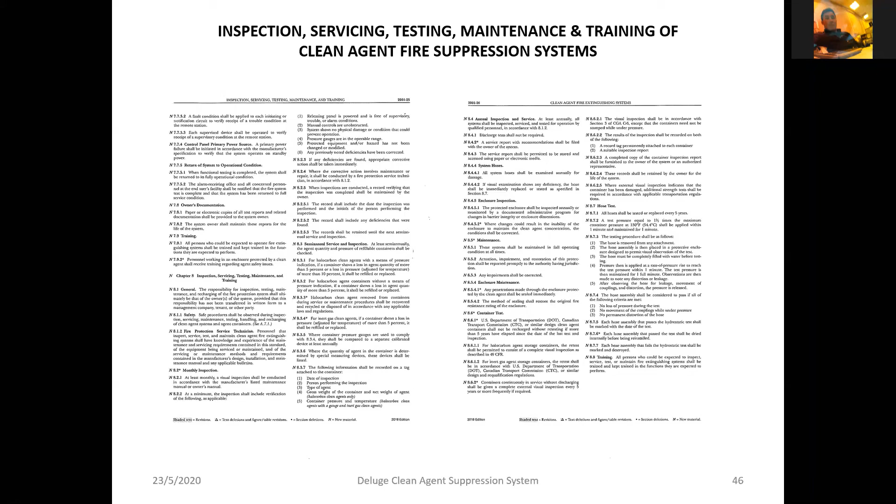Okay guys, we have a lot of questions coming in. For some of the questions that I think Mr. Jacob also already answered in his part of the presentation, I wouldn't go to that. We have quite a lot and not enough time here. So first, we have the first question.

If the source of fire will be a Class E fire, such as the electrical cable of the compressor inside the enclosure. I think I'll take this one, because the Class E that this audience mentioned is actually meaning Class C for US fire classes. As at the beginning of Mr. Jacob's slides, we clarified that different countries use different classes of fire. So the mention here, electrical cable of the compressor, is actually Class C that we mentioned, right, Mr. Jacob? That's correct. Yeah, so we do cover that. So yes, we can use our system as well.